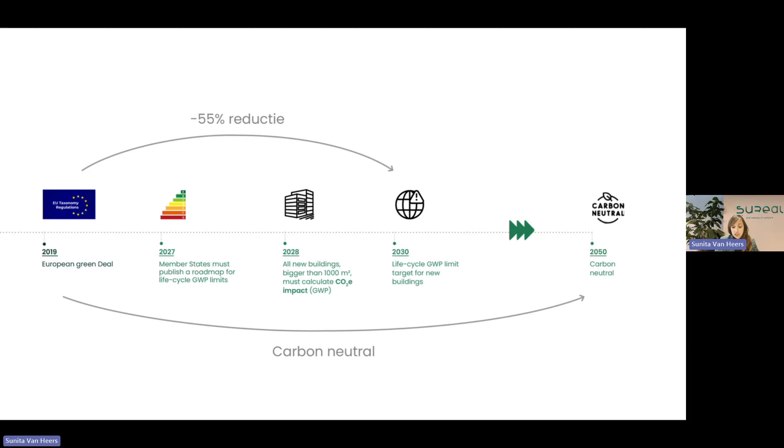And as of 2027, all the member states must publish their roadmap for life cycle global warming potential limits. Then every member state, as of 2028, has an obligation to do a global warming potential. So therefore, carbon in energy use, but also carbon in materials. So it's not just that we want it, it's becoming legislation. So therefore, this session just became even more interesting.

But then how can we measure it? Because it's one thing saying, okay, you need to do it, you need to pay attention to it, but how are you going to actually measure it, and what kind of tools or data could be used for this?

So one of the major elements here, you might already know and do this, is the life cycle analysis. And this is really how you can calculate for an entire building the impact on environmental aspects of the materials used and your energy used. And so this life cycle assessment is a calculation that is done through official European rules on how to calculate it. And it's split up into several phases. You have your first phase, which is of course your product stage.

So, okay, how much energy is linked to extracting raw materials? How much energy, carbon, acidification, other environmental criteria is used for the transportation, then manufacturing, but then also during your construction process stage, what is the water use, the energy use, even transport indeed there, construction practices.

But then also during the usage, because you can have, for example, a material which has a very low intensity in manufacturing, but only has a lifespan of 10 years. So therefore, after 10 years, you will need to replace it. So you will restart your manufacturing from the start. And then, of course, you have end of life stage, because there also you have environmental impact, you have carbon, which goes to waste processing, deconstruction.

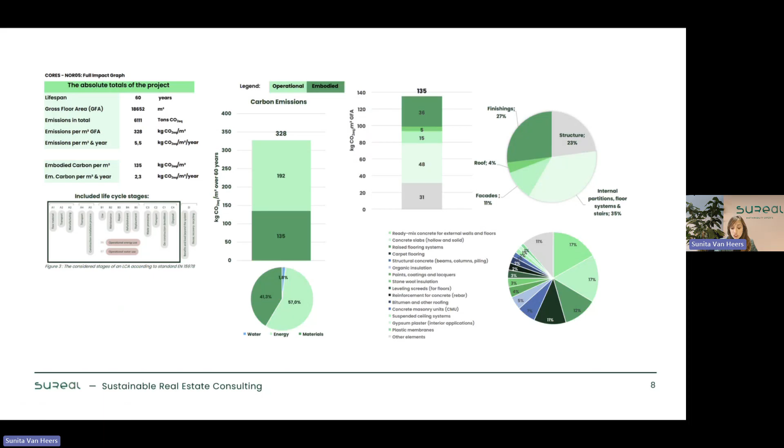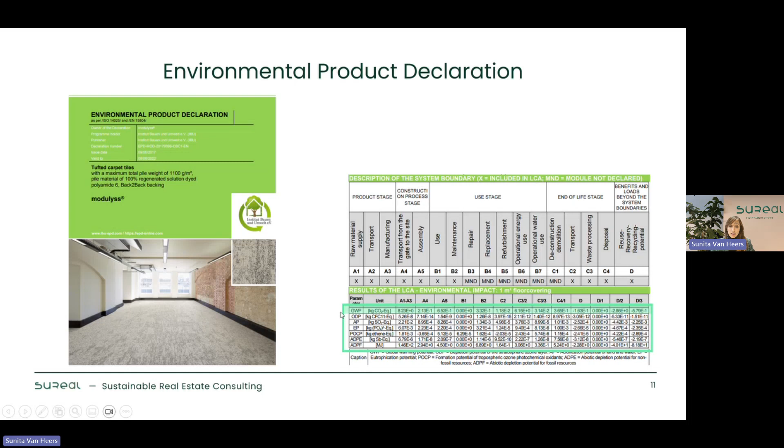And doing this entire study will become mandatory for all member states as of 2030. And a lot of member states already have it in their plans to have it much sooner. So you will perform this analysis, and therefore really digging through the full EPD of a material is very valuable. One of the checks that should definitely be done is to really see that all of the different stages have been filled in and calculated. And then you can start comparing materials to materials to really go towards the final end.

So it's not something that is only in the near future. It is really already a useful tool as of today. But then, of course, why measure if you're not going to do something with it? There are some guidance tools which we can definitely use to reduce the environmental impact of our buildings. So there's a decision-making process that everybody should adhere to. It's of course first preserve.

As a petite anecdote, we're working on a very big project, about 80,000 square meters, an existing building, and we could top off with 7 new floors on a 6-floor existing building. Everybody assumed we're just going to tear down the building and make a new one, because topping 7 floors on 6 floors is impossible. But then we challenged the stability engineer, and they found out that the foundations and the structure were so well designed that we could keep the 6 floors and add the new 7 floors without demolishing anything. We're just putting some extra stability elements, pillars, in the project. So preserving buildings as such or materials as such.

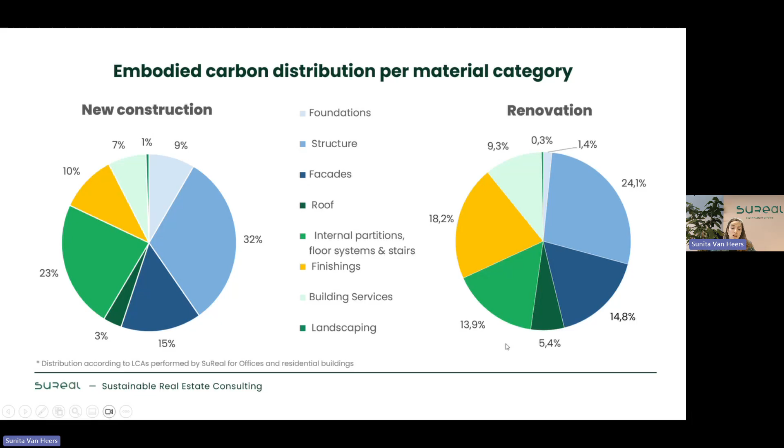As an example, where is most of the embodied carbon stored? We looked at all of the offices and residential buildings that we're working on, at the moment about 150 buildings, so this should be a good comparison all over the world, but a lot in Europe, of course. We can see there's a bit of difference between new construction and renovation. Foundations are not that much here, but structure is always quite an important aspect. Facades, but also the internal partitions, flooring systems, and the finishings have quite a big impact, because typically you need structure, and you have options, but it's not always possible to go to a wood solution. So this is a valuable percentage that we can and should work on.

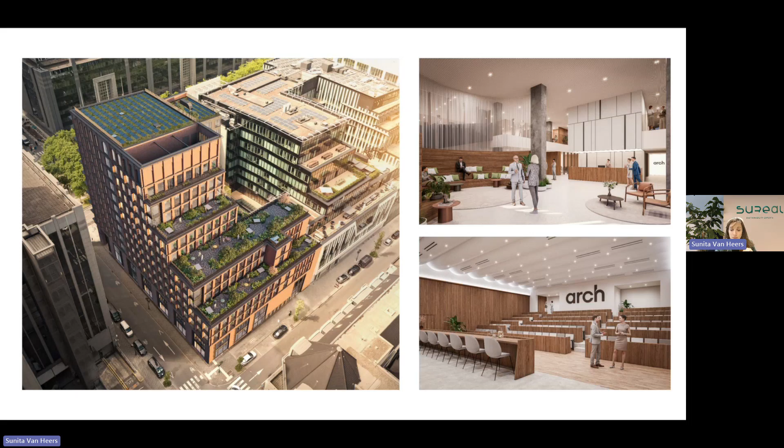Just as a quick example of a project where we went quite far, we had the luxury of working with a very nice developer who wanted to have that dialogue. It's in Brussels, a renovation of an existing office building. There we worked on embodied carbon reduction quite drastically, looking at all of the different layers and optimizing them. We kept almost everything of the existing structure, and we even kept most of the existing facade as well, and then put a new outer facade on it.

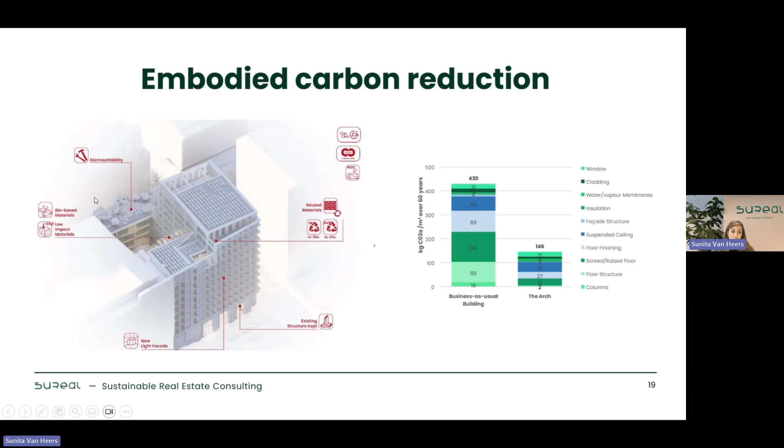Definitely also worked on dismountability, a lot of bio-based materials, and some very nice reuse of materials. For example, all of the granite stones, even at the inside of the building, but also the outside, were all taken away, which is a really impressive kind of setup to get it all out.

And some of the examples: reducing visible technical installations, that's already reducing materials. We have even reused sanitary equipment, but also the design was made so that we could keep all of the vertical circulations, and they were protected during the renovation. So really this reusing as such and actually adapting the design for it.

But then for the glazing and the facade cladding, we couldn't use it as such. So we made a new granito for the ground floor finishes. And then of course, as you see here, really a lot of the structure was kept. And then some parts of the facade cladding were cut and reused as a window shield. The project is finished, by the way.

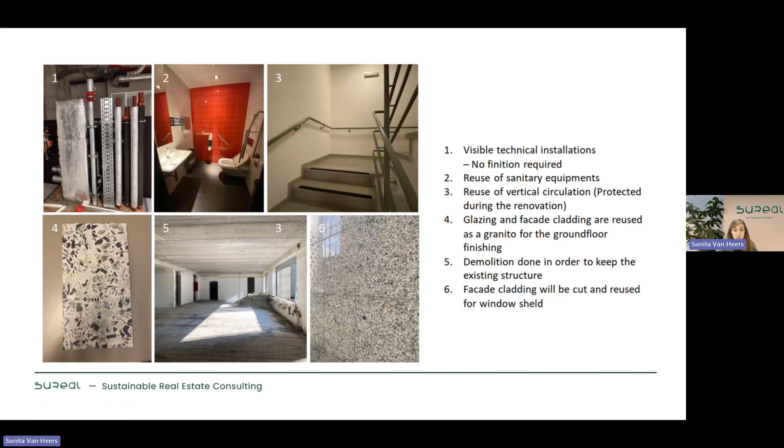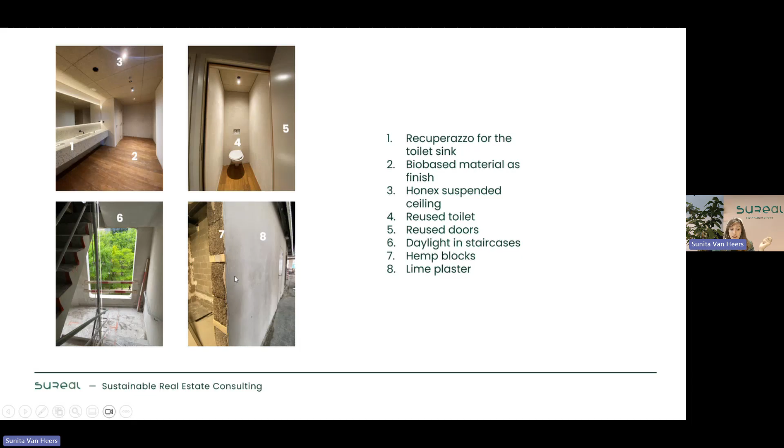We also used, so this recuperazzo, is also used for the sink. We have bamboo even in the toilets, hemp blocks, lime plaster. So we went quite far in it.

But as another anecdote of how far this reuse potential can go on your materials: if somebody says, well, let's just focus on the energy part, the operational carbon, and not that much on the materials. This was also quite a big project, and there we calculated that by reusing the carpets and the flooring system underneath it, the raised floor, it would actually be the equivalent of 13 years of operational carbon impact, which is huge actually. So there again, the importance of looking through it and looking for ways to reuse all of these elements.

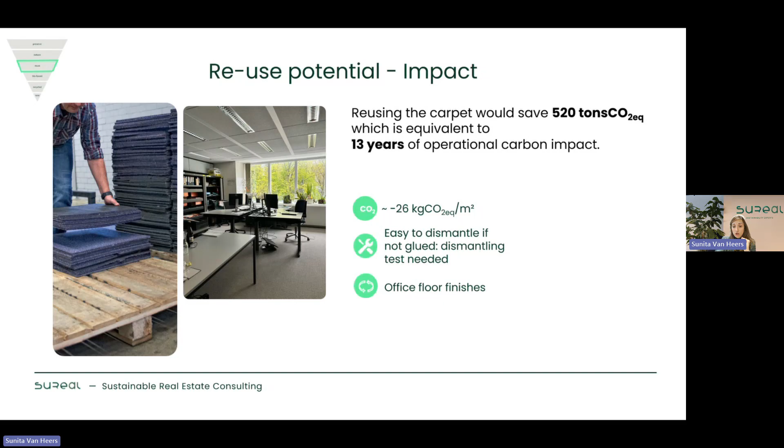But there are also some other business models that actually facilitate this. As a designer, as an architect, it's about thinking of different ways of designing, different ways of using materials. But there are also some help aids when financially bio-based, the reused material is higher.

And in our latest research project that we did with other parties, the circular value index also arose. This circular value index is kind of an indication of whether your product, your solution, has a high potential for circular value, because we talk about circularity, reusing, but the value of your product should also be capitalized. So it's a mathematical calculation: it's the residual value over the cost of reuse times the risk.